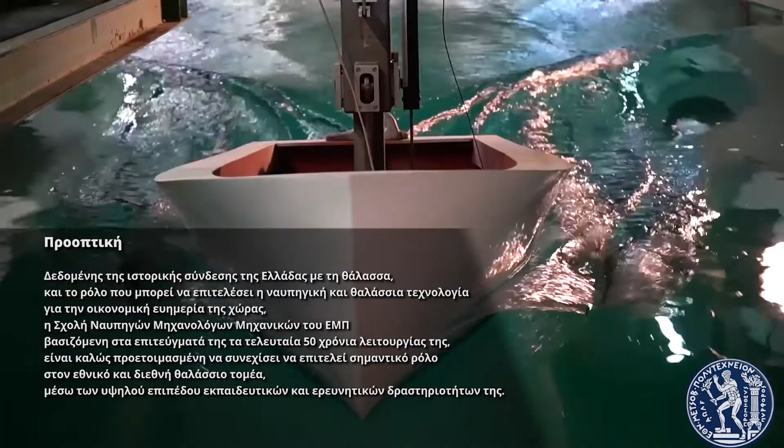My name is Gregory Grigoropoulos. I'm professor at the National Technical University of Athens and the director of the Laboratory for Ship and Marine Hydrodynamics.

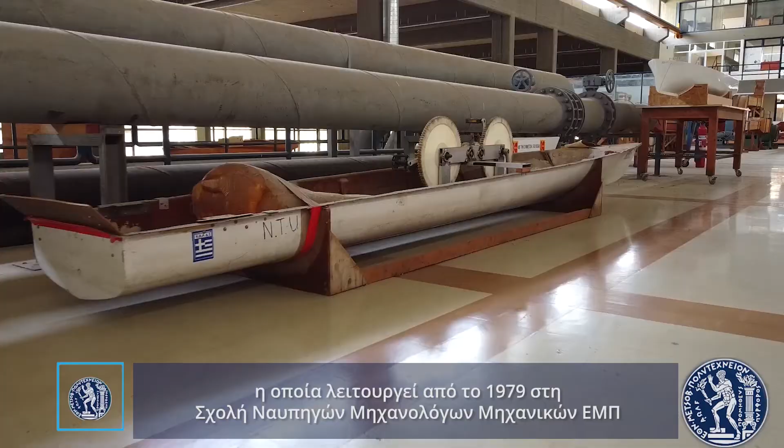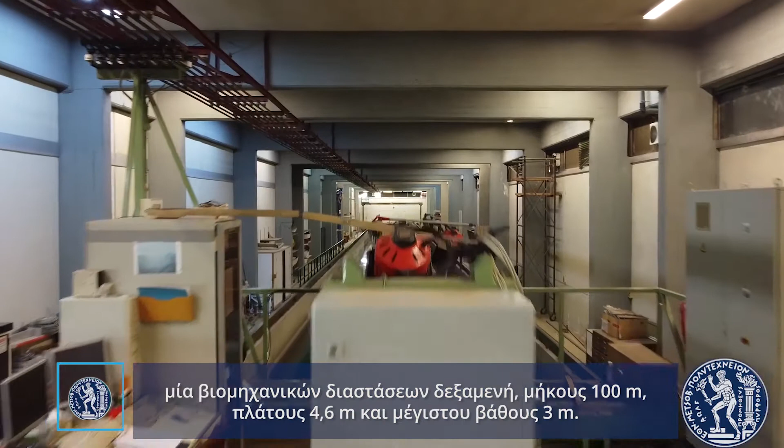The laboratory is a major testing and computing facility operating since 1979 within the School of Naval Architecture and Marine Engineering. The experimental capabilities are based on an industrial-sized towing tank, which is 100 meters long, 4.6 meters wide, and 3 meters deep.

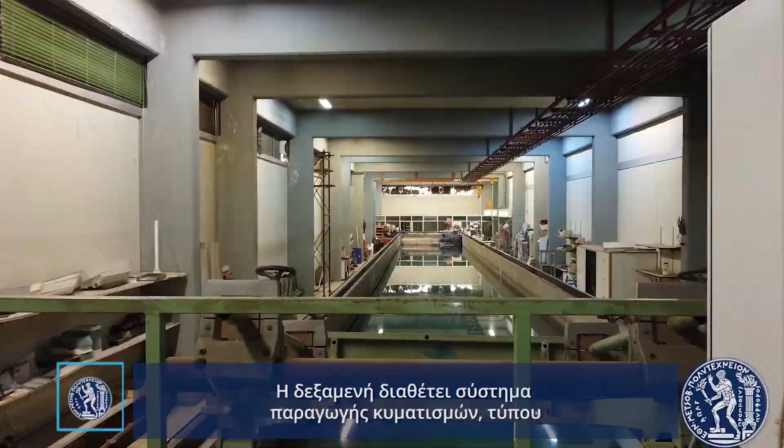The towing tank has a paddle-type wave generator for producing regular and random waves at one end, and a damping shore at the other end. The towing carriage runs at speeds up to 5.3 meters per second.

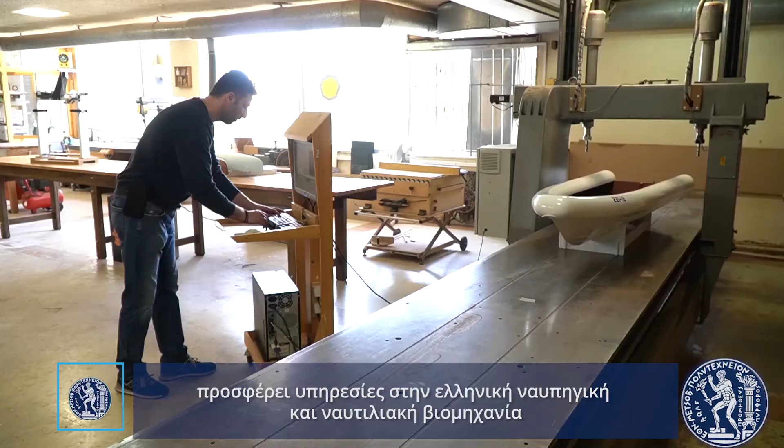The laboratory is involved in education for under and postgraduate students, and research in the area of ship and marine hydrodynamics. It offers services to the Greek shipbuilding and shipping industry, to the Hellenic Navy and the rest of the public sector, and to clients from abroad.

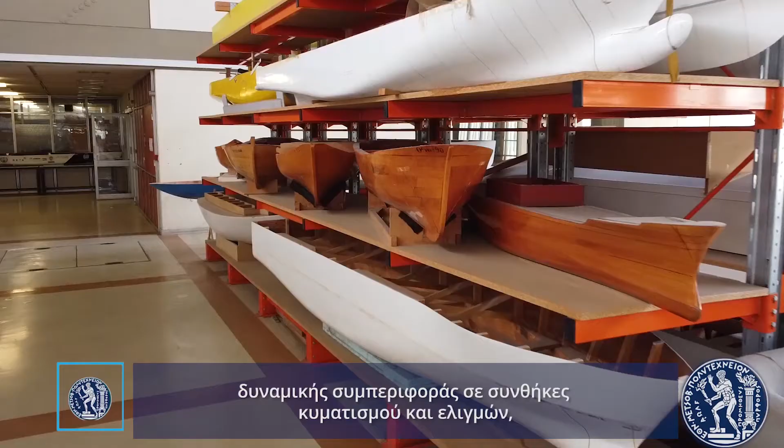Scientific activities encompass sea propulsion, resistance and self-propulsion, seakeeping performance, maneuvering, damage stability experiments, hydrodynamic design, analytical and experimental analysis of wave climate, computational hydrodynamics (CFD), advanced experimental techniques, and in situ measurements on board of ships and large-scale models. We produce results for passenger comfort, ship maneuverability, seakeeping performance, and wash-wake effects.

Towing tank experiments include calm water, regular and random wave tests, hydrodynamic design of conventional ships, design of hull forms, bulbous bows, sponsons, anti-rolling devices, appendages, etc. We model ships, fast and planing ships, single hull and multi-hull vessels, as well as the design of ship propulsion systems.

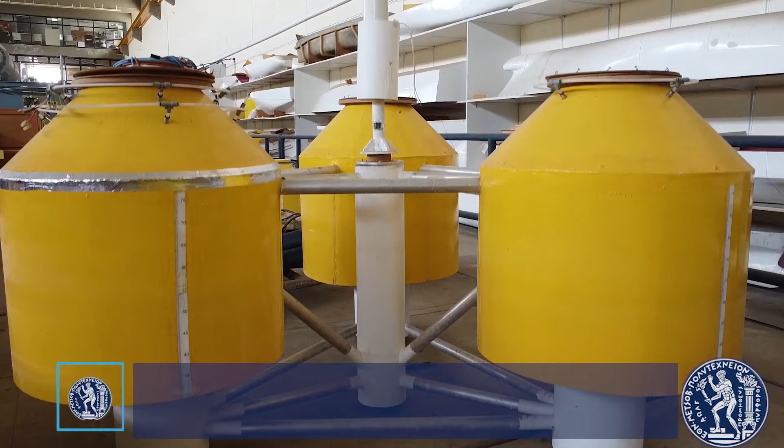We test sailing yachts using a 5-component balance, and floating structures for sustainable energy production based on solar, wind, or wave energy. We have our own model manufacturing workshop and a fully equipped electrical and electronic workshop.

Regarding the marine environment, we carry out studies and calculations for wave propagation, wave-body interaction problems, hydroacoustics, wave energy, stochastic modeling of the environment, autonomous vehicles, and atlases of wind and wave distribution.

My name is Spiros Mavrakos. I am Emeritus Professor at National Technical University of Athens and former Director of the Laboratory for Floating Structures and Mooring Systems in the School of Naval Architecture and Marine Engineering.

The laboratory is currently directed by Professor Yannis Hadjigeorgiou, Vice Rector of Research and Lifelong Education. The laboratory was established in 2005 by University Senate decision and by governmental decree in 2009.

Its main objectives are teaching, research, as well as consulting activities to the industry in the scientific field of floating structures and mooring systems, which are associated with a broad spectrum of economic activities and applications.

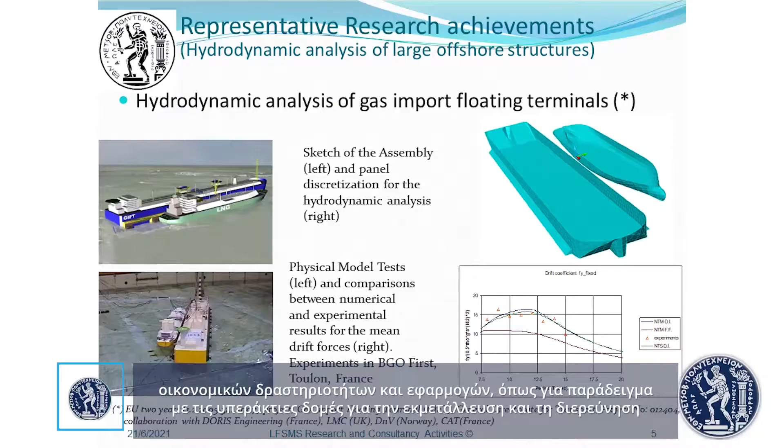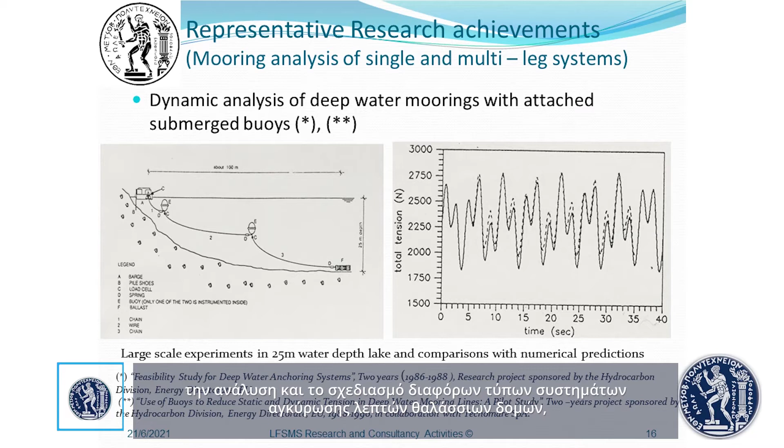For example, offshore structures for oil and gas exploitation and exploration from the marine environment, marine structures for offshore renewable energy exploitation including wind and wave energy, as well as hybrid solutions, analysis and design of several types of mooring systems and slender marine structures, and infrastructures for residential, tourism, industrial, and sustainable energy development in coastal and offshore waters.

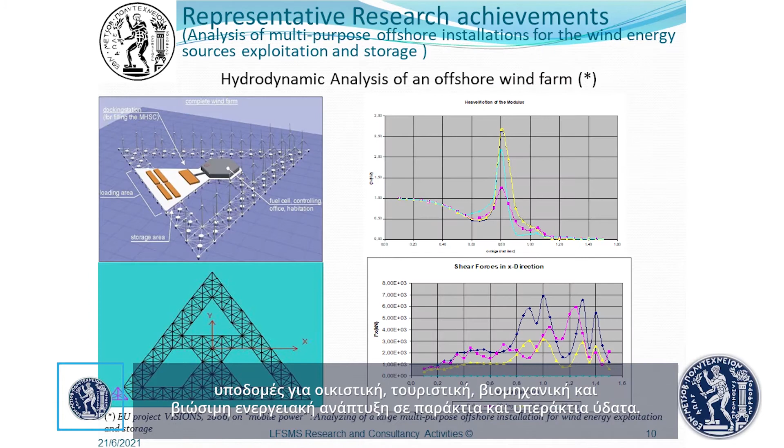The educational activities of the laboratory include teaching of 3 undergraduate and 6 postgraduate courses, as well as support to several diploma theses and doctoral dissertations.

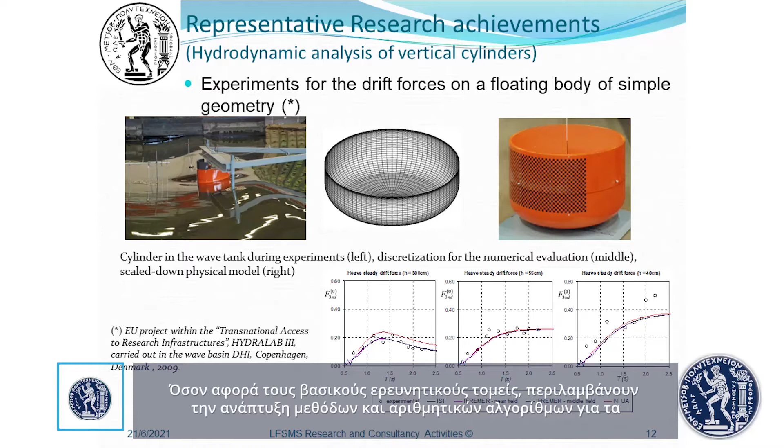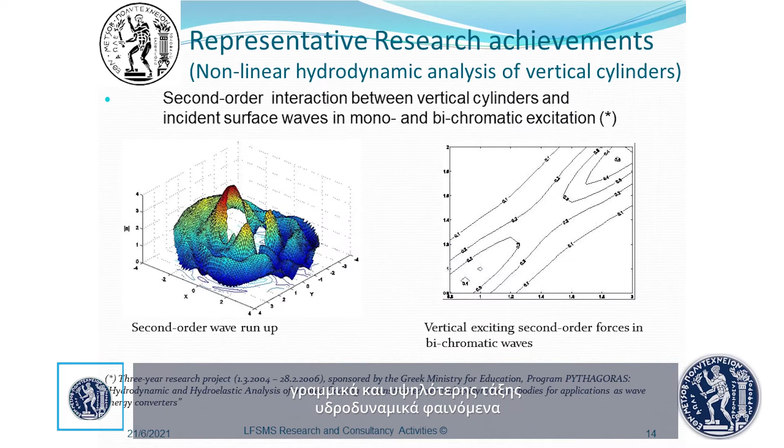As far as key research areas are concerned, they include development of methods and numerical algorithms for the linear and higher order hydrodynamic body-wave interaction phenomena using analytical and numerical methodologies.

A second research area is the investigation of body-wave interaction in the presence of a marine current, as well as hydrodynamic analysis of floating structures advancing with low forward speed in waves.

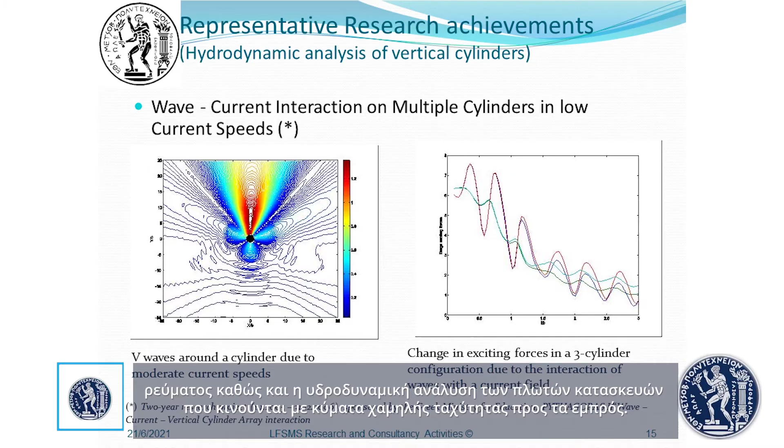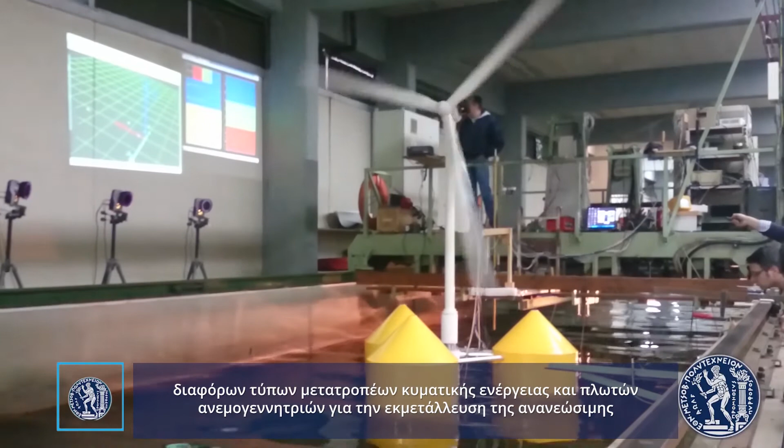A third focal research area is the analysis and design, as well as the efficiency evaluation, of several types of wave energy converters and floating wind turbines for renewable marine energy exploitation.

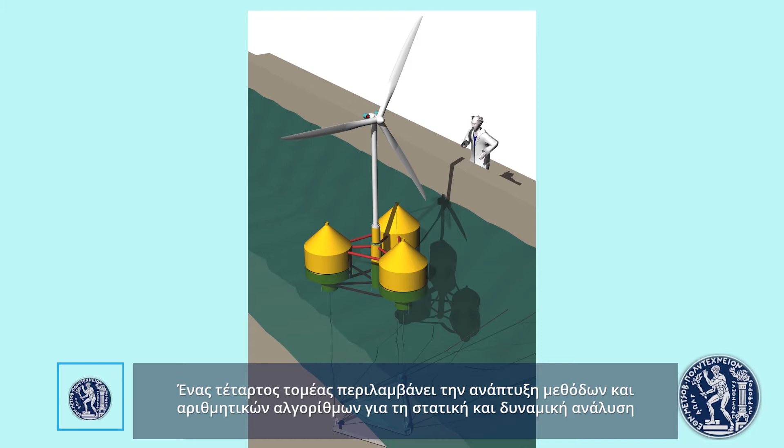A fourth research area includes development of methods and numerical algorithms for the static and dynamic analysis of mooring systems, risers, and slender marine structures. And finally, the investigation of motion response analysis of moored marine structures in the open sea and in harbor areas.

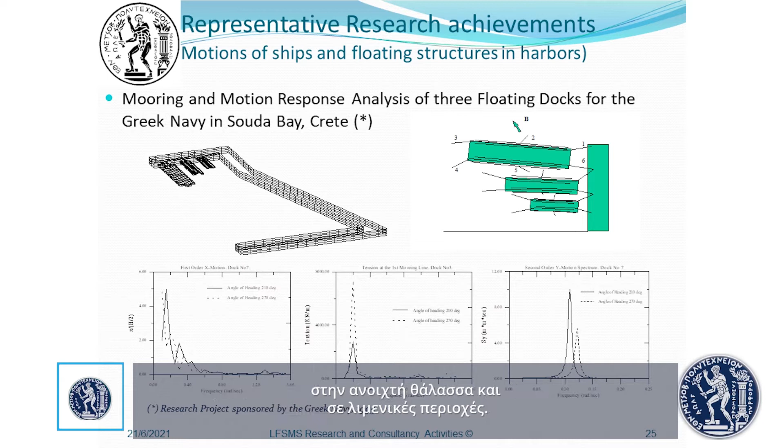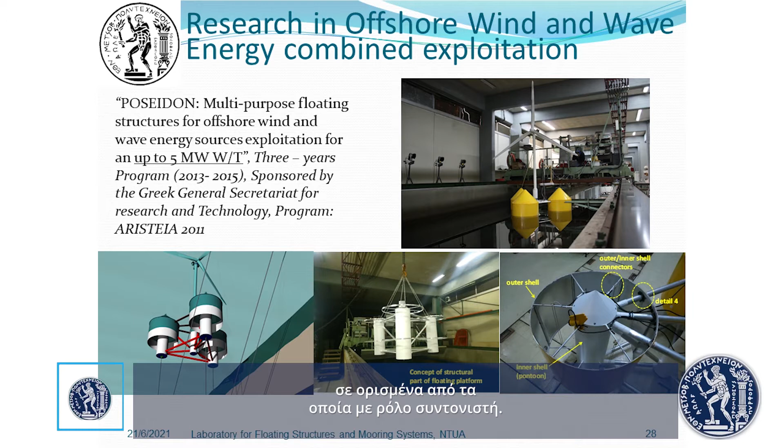The laboratory has participated in several European and national competitive research programs, in some of which acting as coordinator. The laboratory also offers specialized consultant services to the industry in areas of hydrodynamic analysis of several types of marine structures.

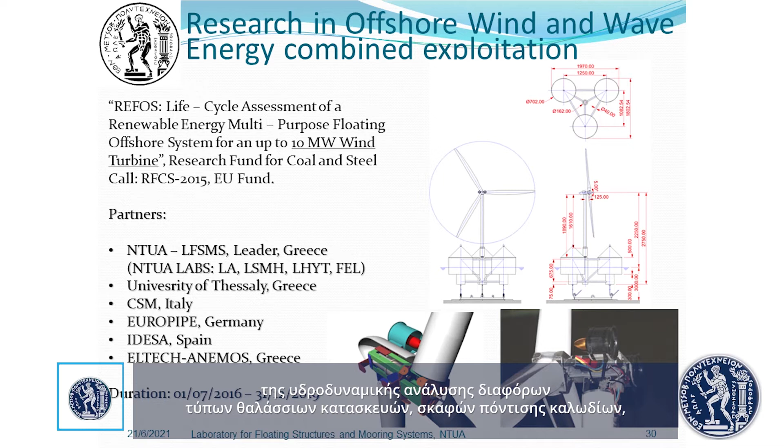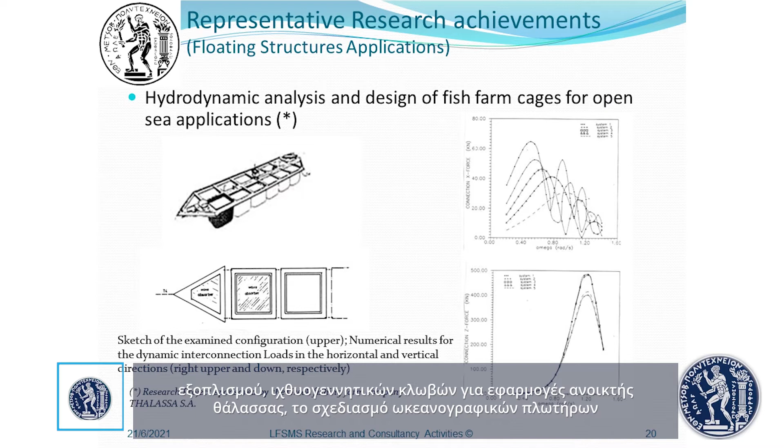Cable-laying vessels, as well as special purpose floating structures, with indicative applications to the deployment of scientific equipment, fish farm cages for open sea applications, the design of oceanographic buoys, and finally the mooring line analysis and design of moored vessels.

Hello, my name is Nicholas Tsouvalis and I am professor at the School of Naval Architecture and Marine Engineering of NTUA and director of the Shipbuilding Technology Laboratory.

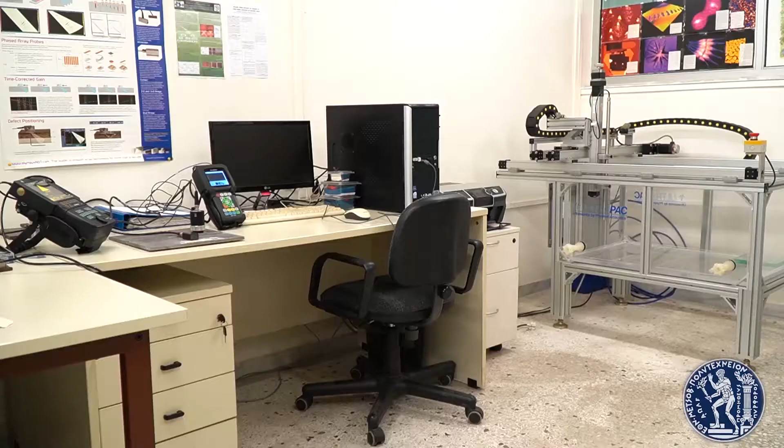The laboratory was established in 1975 and its basic objective is research on engineering materials and on the structural design and fabrication parameters that influence the performance of marine structures.

This objective is achieved through educational and research activities, as well as through providing specialized engineering services and technical consulting to the industry. The educational activities of the lab include teaching of 7 undergraduate and 4 postgraduate courses, as well as support to several diploma theses and doctoral dissertations.

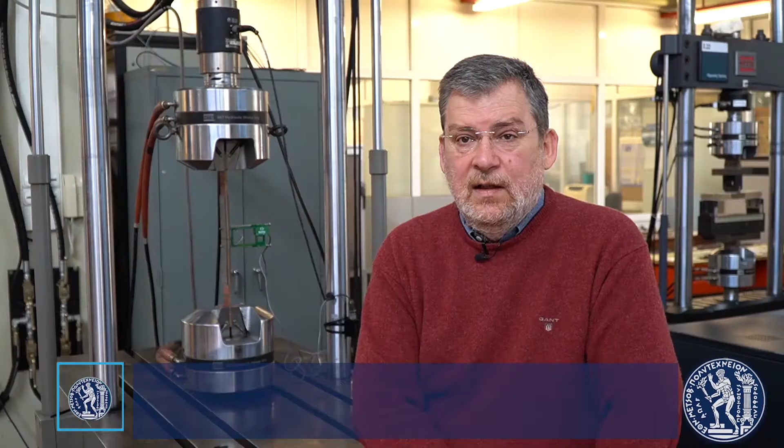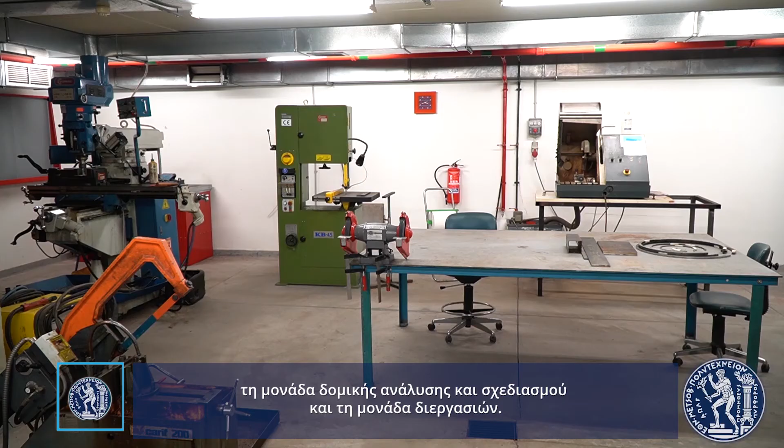The laboratory consists of 4 units: the Tests and Measurements Unit, the Materials Characterization Unit, the Structural Analysis and Design Unit, and the Processes Unit. All these lab units are supported by a fully equipped machine workshop.

The research activities of the laboratory are focused mainly on the following topics. First, structural analysis, design optimization, and structural health monitoring of marine structures, employing various design and structural analysis software and a 76-core computer cluster.

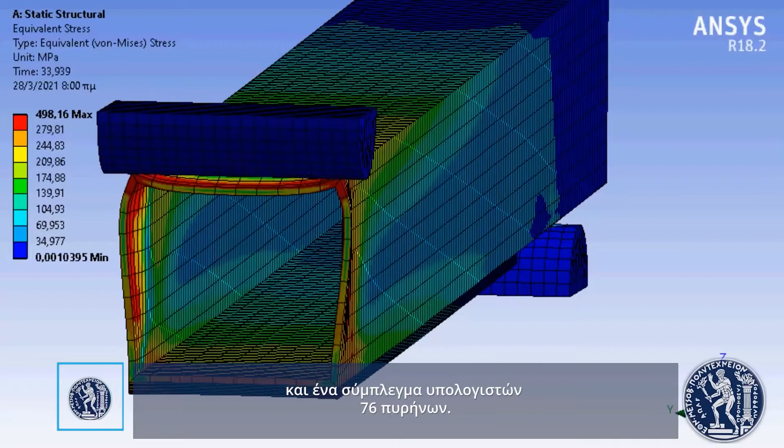Second, welding science and technology, employing equipment like a welding robot and welding machines for various welding methods, including friction stir welding.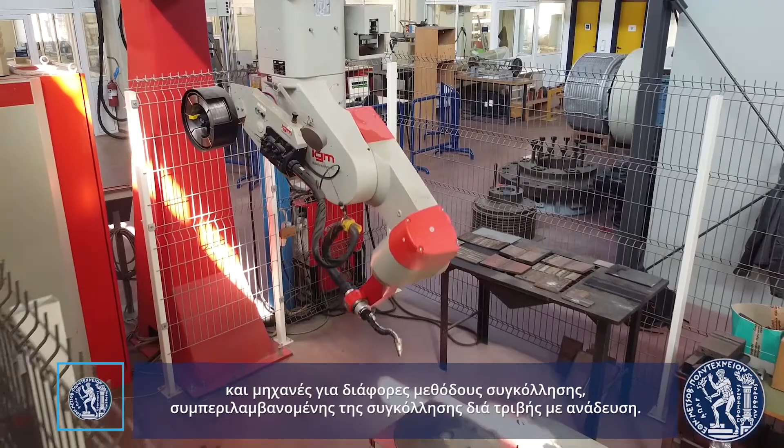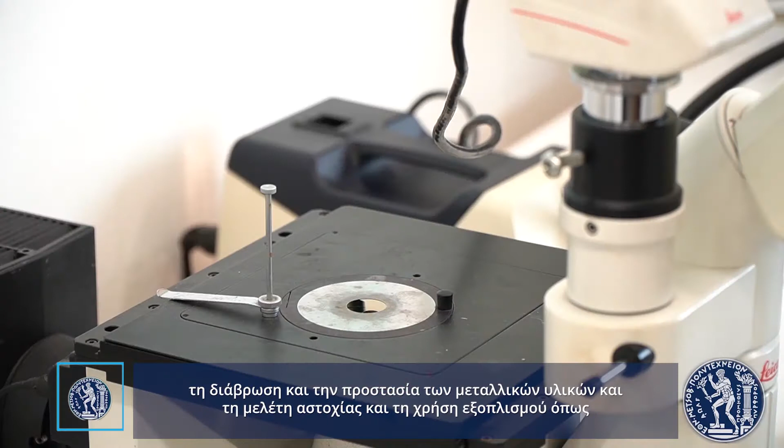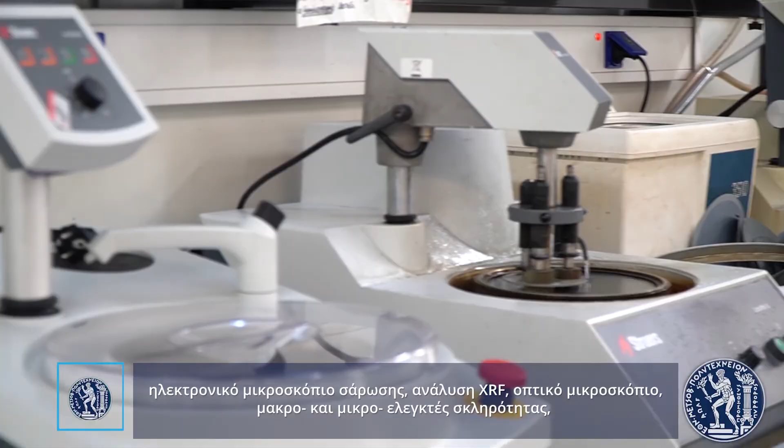Third, material science and technology, including thermal treatments, corrosion and protection of metallic materials and failure analysis, employing equipment like a scanning electron microscope, XRF analysis, optical microscope, macro and micro hardness testers, electrochemical instrumentation, a salt spray chamber, and surface characterization equipment. Composite materials and hybrid metal to composite adhesive joints, employing special equipment for manufacturing composite materials products.

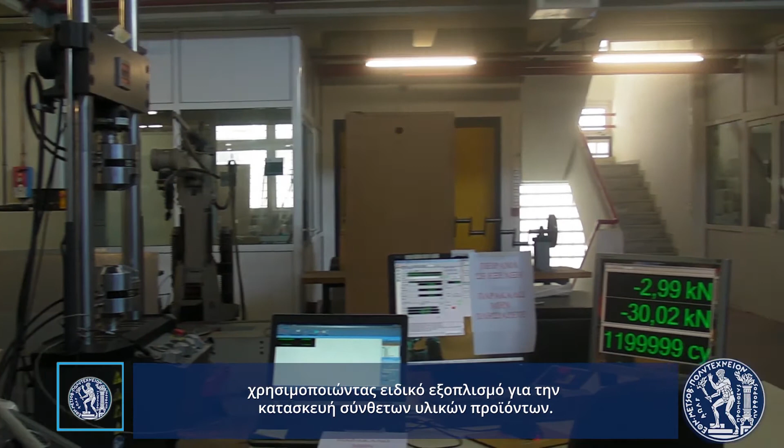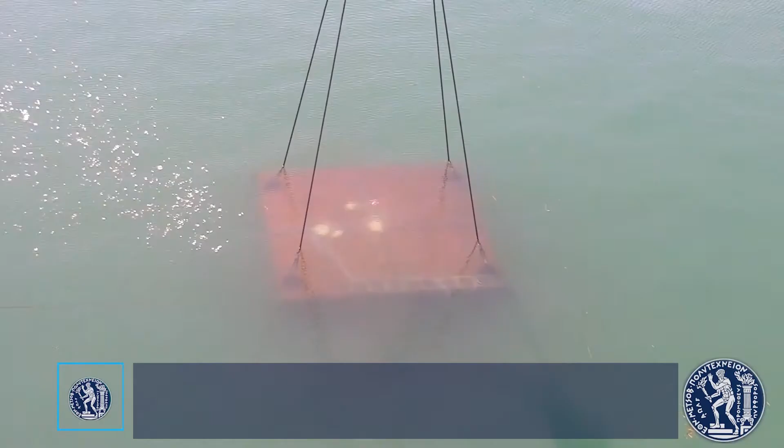Fifth, destructive and non-destructive testing of materials and structures, employing 2 universal hydraulic testing machines, a multi-channel data acquisition system, and various equipment for ultrasonic non-destructive testing. Finally, design and implementation of full-scale in-situ tests for monitoring the structural response of large structures.

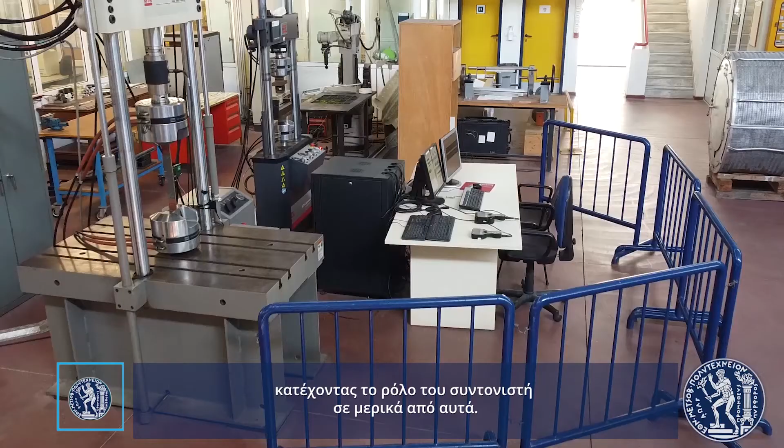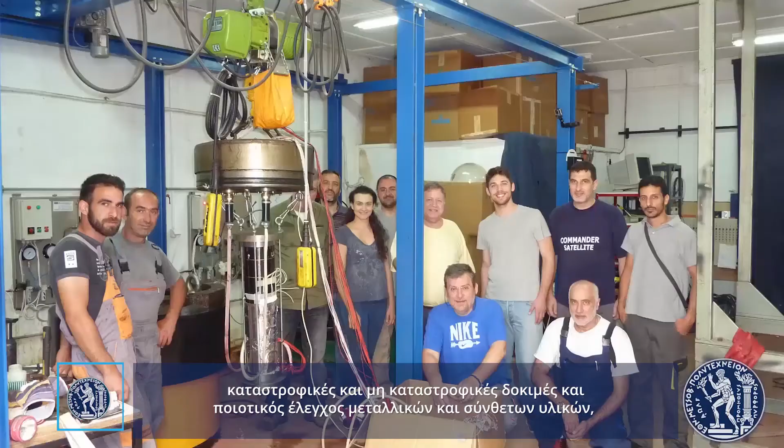The Shipbuilding Technology Laboratory participates in several European and national competitive research projects, in some of which acting as coordinator. The lab also offers specialized engineering services to the industry in areas like structural design and analysis of marine structures using numerical simulation methods, destructive and non-destructive tests and quality control of metallic and composite materials, failure analysis of marine and mechanical engineering parts, and finally corrosion and protection design for metallic structures.

I am Dimitris Lyridis. I'm the Director of the Laboratory for Maritime Transport in the School of Naval Architecture and Marine Engineering of the National Technical University of Athens.

The School of Naval Architecture and Marine Engineering has several laboratories. One is the Laboratory for Maritime Transport. This was informally established as a research unit by Professor Harilaos Psaraftis in the 90s, and it has been established as a formal laboratory in 2006. It has two faculty members, Associate Professor Nikos Ventikos and myself, who is also the director of the laboratory.

We have one special research and teaching staff, 10 PhD students currently, 7 research staff, 1 administrative staff. We offer 8 undergraduate courses, 3 graduate courses, and up to this day we have completed in the lab more than 8 PhD theses, 250 diploma theses, 70 projects, state and private, funded either by the EU or the Greek state. We have handled more than 15 million euros.

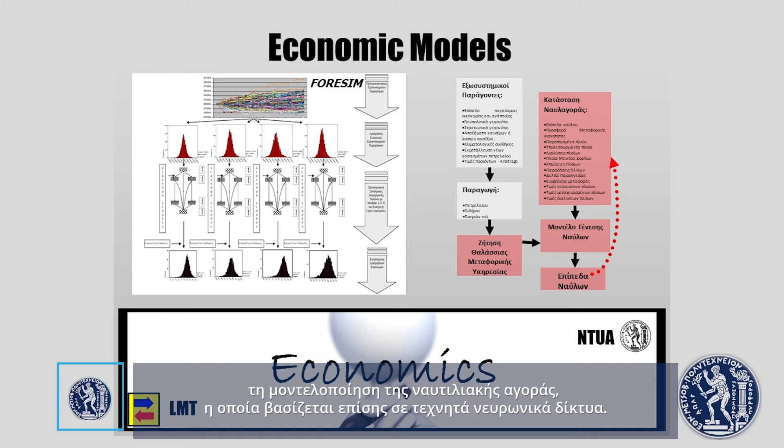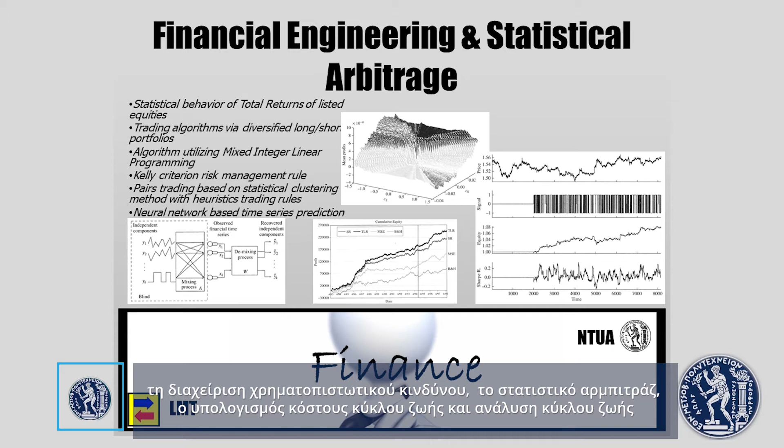Our indicative research areas include, except of course for education and training, modeling of the shipping market, also based on artificial neural networks. We also offer research and expertise in financial engineering, company valuation, financial risk management, statistical arbitrage, life cycle cost calculation and life cycle analysis, supply chain optimization and intermodal logistics.

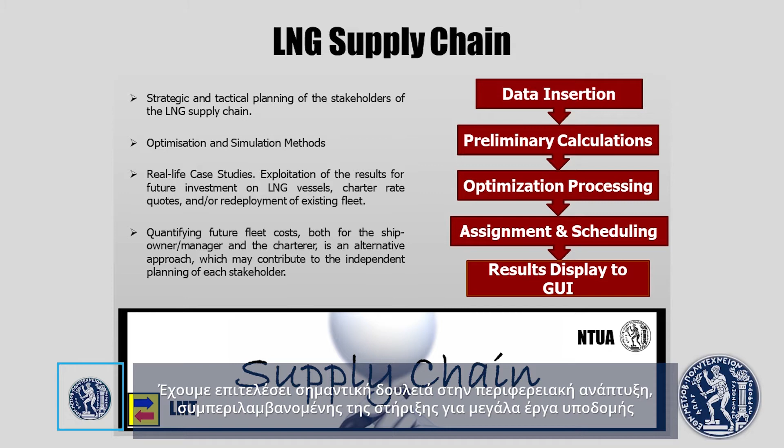We have a lot of work done in regional development, including support for large infrastructure projects in terms of project development, funding, project finance for vessels, ports and energy. We have a lot of work in policy such as maritime clusters, commercial policy and regulatory framework, environmental analysis and air emissions.

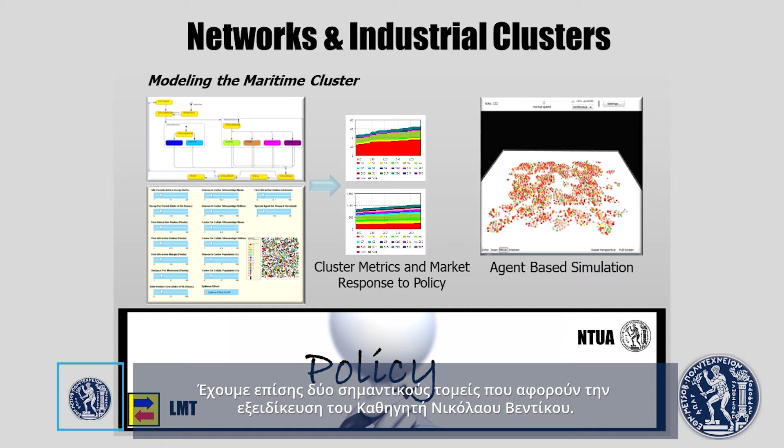We have also 2 important areas that have been in the specific expertise of Professor Nikolaos Ventikos. These are safety-related and risk-related topics associated to maritime safety, the environment and the human factor.

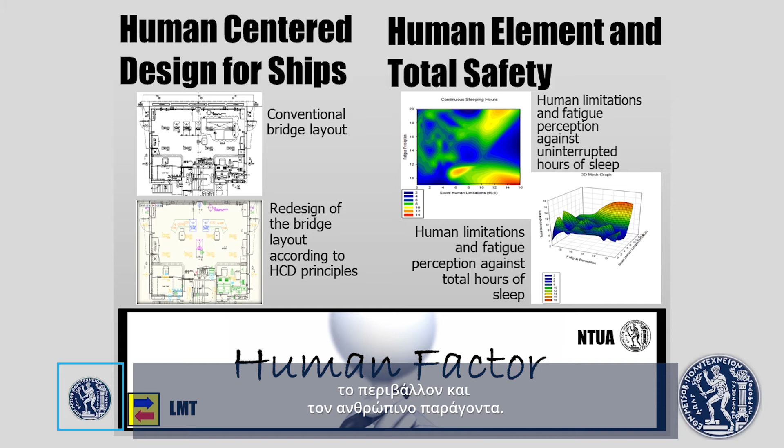Indeed, we are trying to be in the elite of the research units worldwide, expanding our efforts towards resilience engineering and maritime sustainability analysis with a focus on innovative and disruptive technologies. Our portfolio is getting stronger by the day, especially in the studies of economics, finance, energy, safety, human factor, all the areas I have already mentioned, and especially new systems in the areas of offshore and gas industry.

For more information, you can visit our webpage at www.martrans.org.

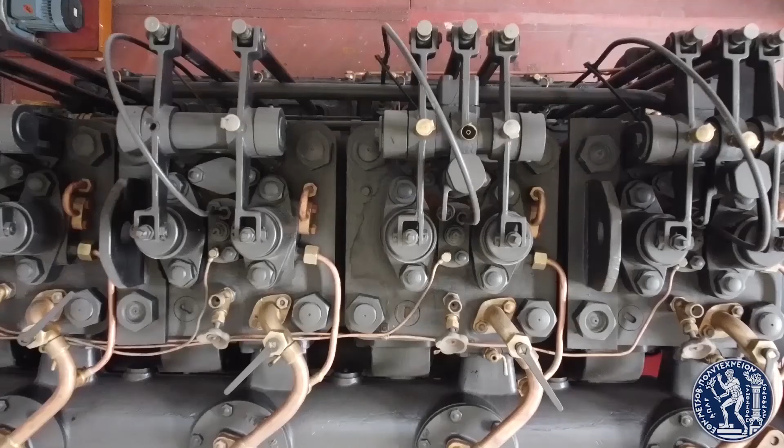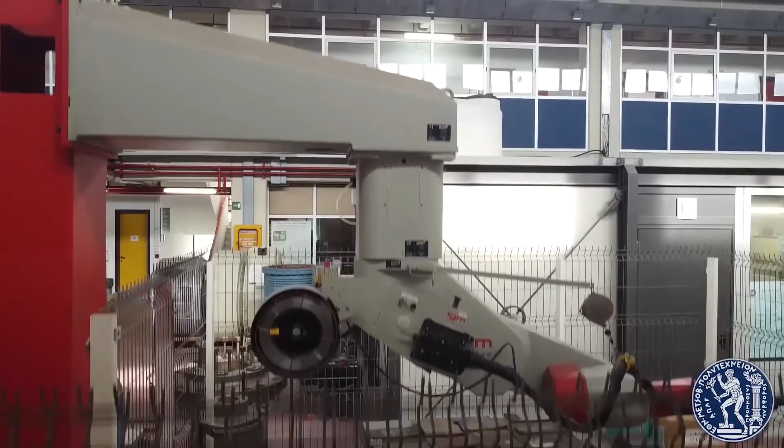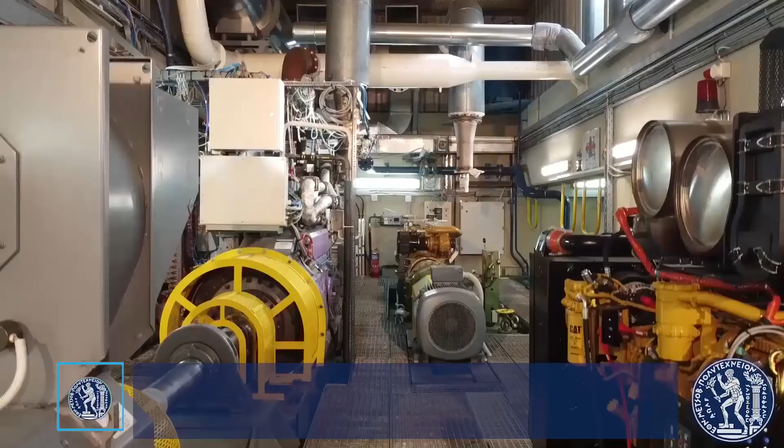My name is John Prousalidis and I am the Director of the Laboratory of Marine Engineering of the National Technical University of Athens, in the premises of which we are right now. Marine engineering is one of the major scientific sectors of the School of Naval Architecture and Marine Engineering.

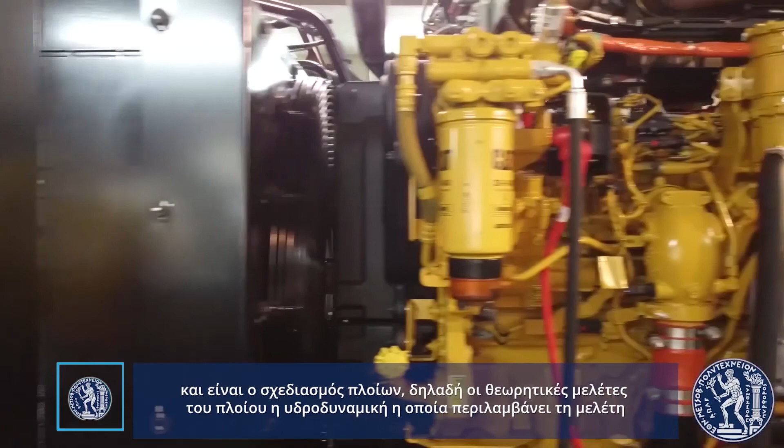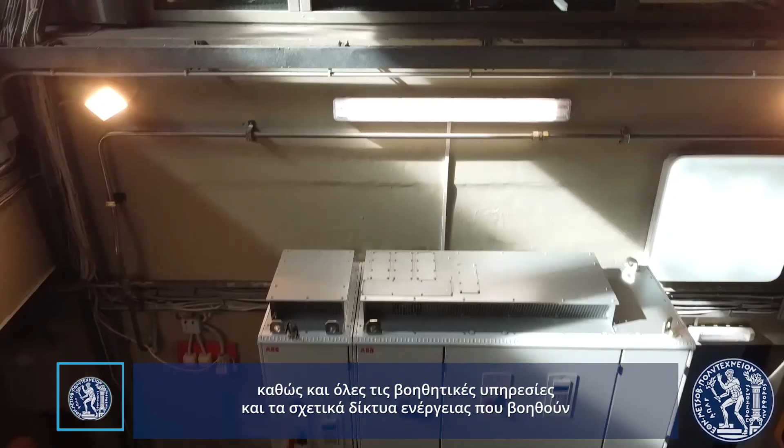Which are ship design, that is to say the theoretical design of the ship, hydrodynamics, which comprises the study of the interaction of the vessel with the seawater, marine engineering, which deals with the study of the main ship propulsion system, the most expensive and critical equipment on board, as well as all service loads, auxiliaries and the associated energy networks assisting the ship to accomplish her mission.

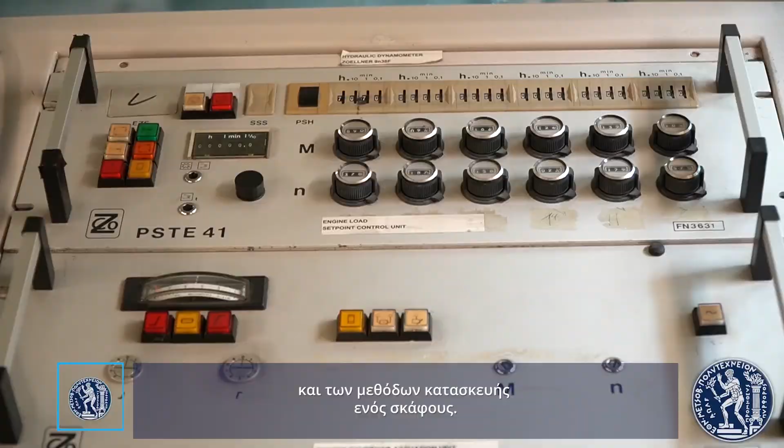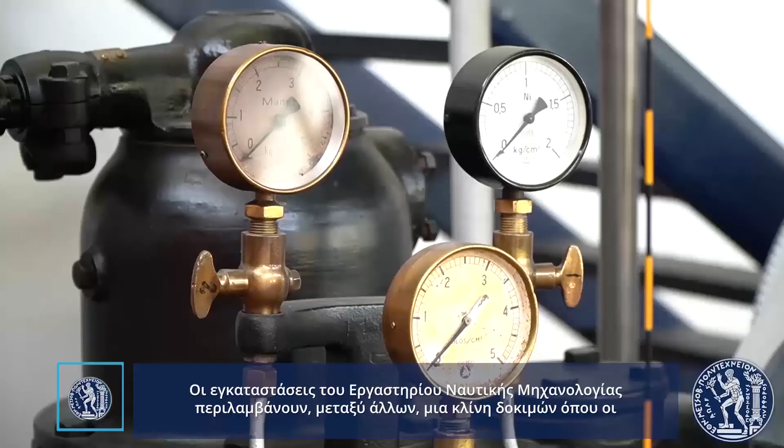And finally, shipbuilding, which comprises the studies of the materials and methods of constructing a waterborne vessel. Focusing on the marine engineering primary objective, this is the analytical study and testing of the coordination between the propulsion engine and the propeller. The premises of the Laboratory of Marine Engineering comprise, among others, a test bed where propulsion engines and other systems can be tested via measuring methods of high accuracy.

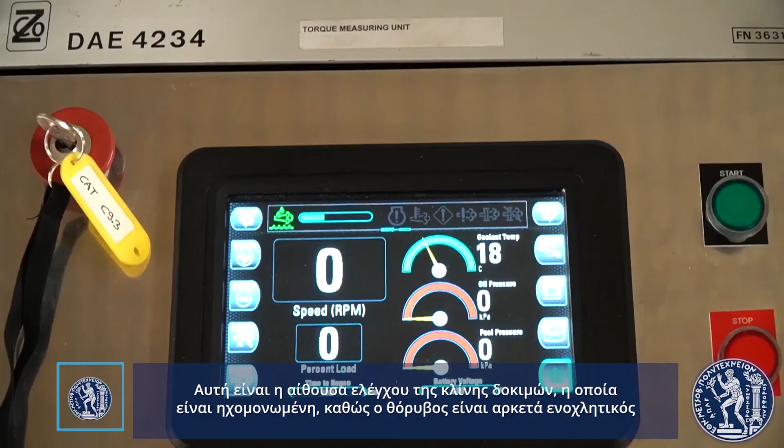This is the control room of the test bed, which is soundproof as the noise is pretty annoying when the engines operate, beyond, let's say, 110 decibels. Moreover, the experimental results of the system examined in the test bed can be confirmed via theoretical analysis tools too.

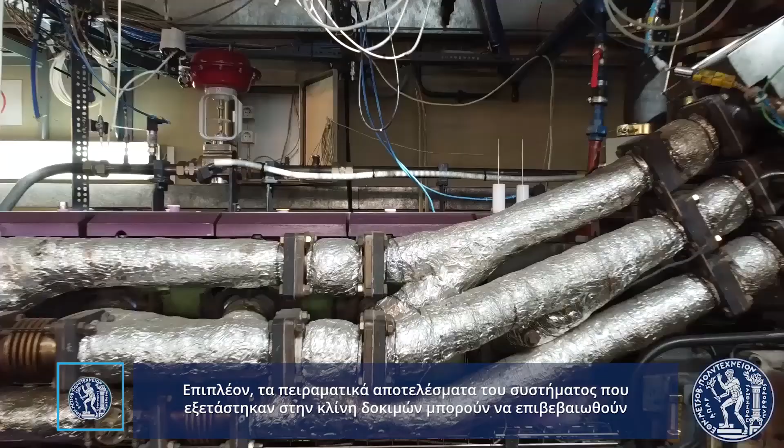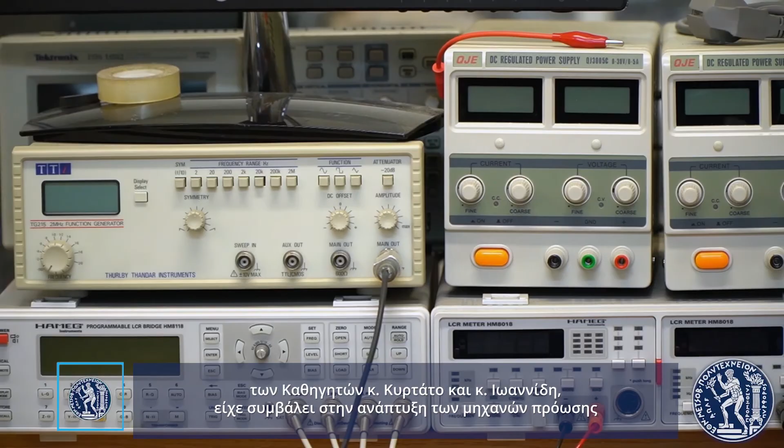During the last 3 decades, the laboratory under the direction of the previous directors, Professors Kyrtatos and Ioannidis, had contributed to the development of propulsion engines, which have been used in most ships, and has been recognized among the best laboratories of this category worldwide.

Furthermore, taking into consideration the modern challenges for decarbonization via alternative fuels and green shipping in general, the Laboratory of Marine Engineering has started being properly transformed. Within this context, testing equipment for electric propulsion and hybrid electric propulsion systems have been integrated, while a new engine using methanol as a fuel has been installed.